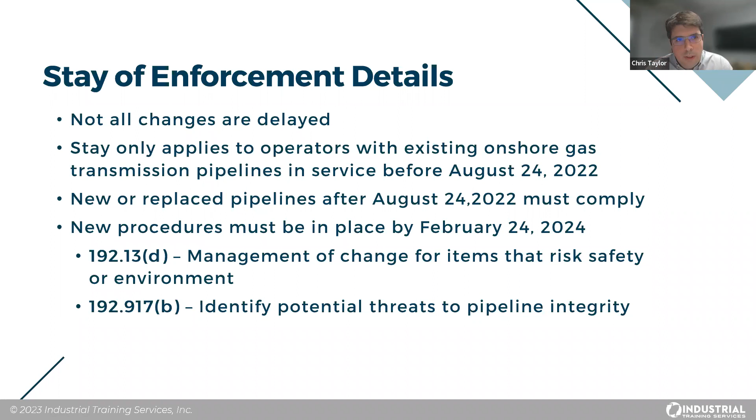So is this stay of enforcement just at the federal level? I'd imagine so. But how will states react, or do they typically honor these? How does that work? Well, PHMSA has requested that the states follow this stay of enforcement, but a state can impose this final rule on intrastate pipelines. So they don't have to.

I believe most states will likely follow the stay of enforcement. One, since there's not any guidance provided by PHMSA on what the operator should be doing, states would really not know exactly what they're supposed to be inspecting to. And one of the things about these last two requirements that we were talking about, for the management of change and potential threat identification portions, an operator could request an extension up to 1 year to get those done for their program if they file it within 90 days of that February 24th, 2024 deadline, and they'd have to go through the electronic notification request.

So even more reason to be digging into this, and many operators I'm sure already are getting ahead of this, and it sounds like you do have some flexibility with even requesting extensions to comply. Thanks for the explanation on stay of enforcement. That's always kind of interesting to me on how some of this works.

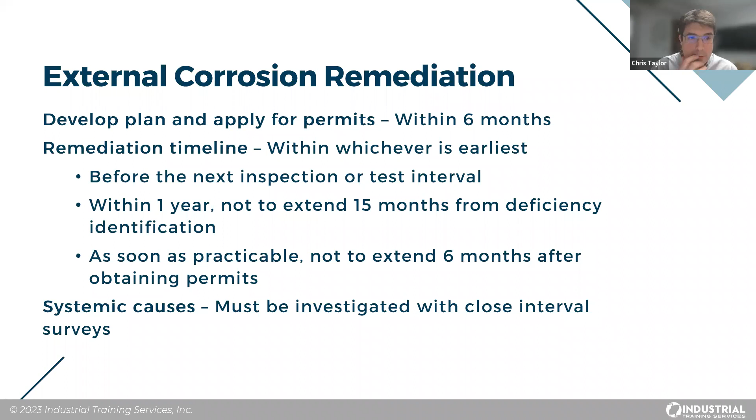So whichever is earliest, before the next test interval or inspection. So depending on what area the external corrosion is on, within 1 year, not to exceed 15 months from the deficiency identification, or as soon as practicable, not to exceed 6 months after obtaining the permits. So they're calling it out. And another thing they called out was anything that appears to be a systemic cause has got to be investigated with close interval surveys, which we'll talk about in just a little bit. So it's very prescriptive timelines for repair.

What are the requirements for interference current issues? Again, there used to be just a short blurb about interference, but now they're going specific. So when to conduct these interference surveys, if an operator is aware of significant increases of stray current. So they're going to be looking for operators to actually be doing those investigations to see if there's stray current on their facilities. So if new pipelines come into the right of way or new overhead lines, that would be new potential stray currents that are introduced, but making sure that you've done surveys to see if it's affecting your pipeline or not.

And then again, you have to develop a plan and apply for those permits within 6 months. So if you're on BLM land or Corps of Engineers land, to get in there to do some work once you know that you've got this interference, they're wanting people to be proactive about this. And then the remediation timeline, very similar to the external corrosion, within 15 months of completing that survey, then that's being remediated. And then as soon as practical, not to exceed 6 months after obtaining those permits.

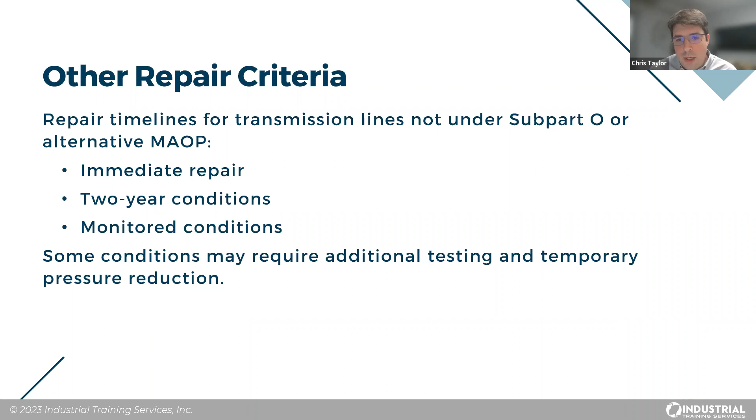Besides planning for repairs and adopting new timelines, PHMSA also updated and created new and revised definitions for Part 192. From what I understand, Warren, these are a very important part of the regulations. How do operators use these? Why are they important? Well, certainly the addition of a definition is to help them describe what's going to be required in the parts of the code that they've added or amended. So an operator uses these definitions to say, okay, this affects me, or this doesn't affect me, or under this certain condition, I'm going to be affected and I need to know what I need to do.

Let's get into some of the specific definitions that were added. Let's start with the new ones. Close interval survey, this is a requirement that operators use close interval surveys when they find these systemic deficiencies with their cathodic protection levels for external corrosion. It was never specifically called out that they use close interval surveys, but now they will have to.

These systemic conditions would be, say, over 4 or 5 miles of pipe. You've got a really low area, not just a single test station, but a longer stretch, maybe a short lateral. A single station wouldn't be systemic because you may have a lead that has fallen off of a rectifier or something like that. But certainly a lot of operators do use close interval surveys, but it's actually called out more now.

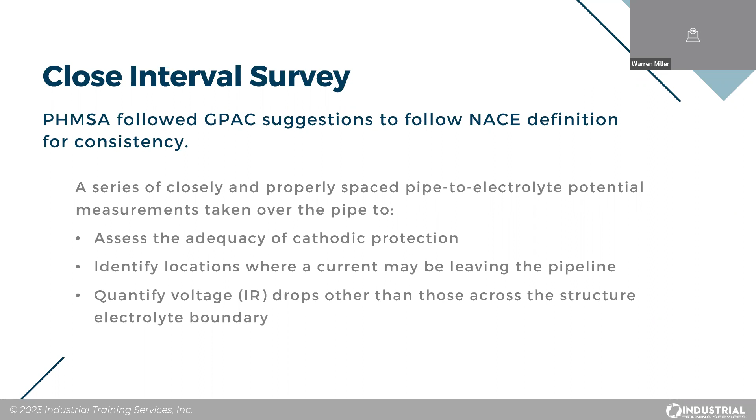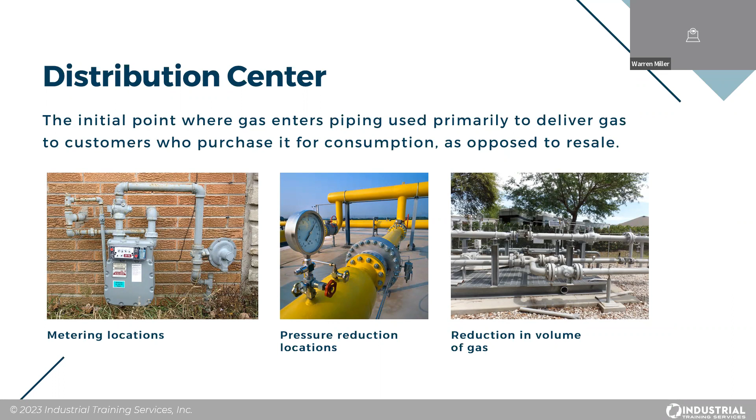All right. Distribution centers, that's a new one, isn't it? It is. Distribution center is now specifically defined to further add the separation between distribution and transmission facilities. One of the things it talks about is the initial point where gas enters piping used primarily to deliver gas to customers who purchase it for consumption as opposed to resale. And this includes metering locations, pressure reduction locations, and locations where there is a reduction in gas volume. So it's given operators that much more information in how to determine what systems they have.

I know there's additional definitions on screen that we're not really going to get into, but they're spelled out and very clear about what they're intended to mean. Understanding that PHMSA has defined it because somewhere in this final rule they're addressing it with certain requirements, wanting to make sure it's crystal clear. The operator knows what PHMSA considers a wrinkle bend or a hard spot, or an inline inspection. Definitions are put in when they are not the same as a Webster dictionary definition - they've either defined it more critically or added additional information not typically found in a dictionary, and that's why they're in here like this.

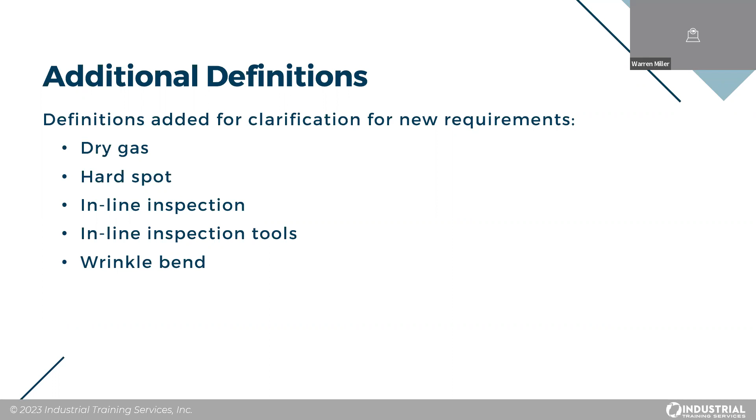Something significant within the definition then would translate into how operators should really look at these definitions and make sure they understand what PHMSA understands to be a wrinkle bend, for instance. Correct. Were there any definitions that were revised?

There was one revision, and it's transmission line. So transmission line now has a fourth opportunity - an operator can voluntarily designate that their pipeline is a transmission pipeline. So the first three have been very standardized: transports gas from a gathering line or storage facility to a distribution center, operates at a hoop stress of 20% or more of SMYS, or transports gas within a storage field. So you meet this definition if you are here, but this allows somebody who actually has a distribution system, in certain cases, to call themselves a transmission pipeline.

I assume once they've designated that, they probably aren't going to be allowed to go back, but that's my assumption. I'm hoping PHMSA actually provides guidance on what this last bullet really is meaning. I'd be curious as to why this would be advantageous for operators. That'd be interesting.

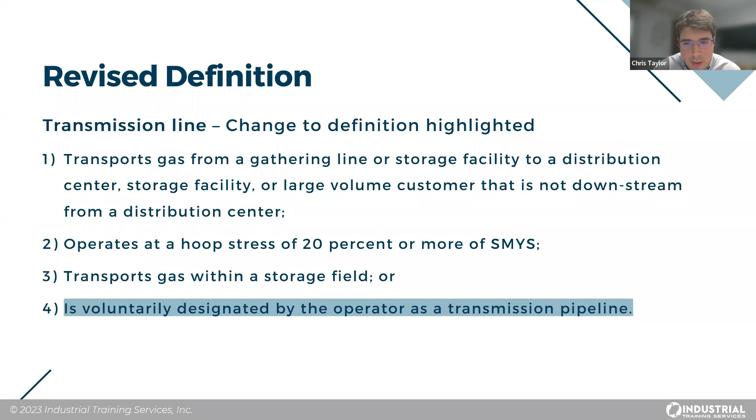Warren, let's discuss new assessments of pipelines after installing 1,000 feet or more in a ditch. Can you explain what's now required in this scenario for transmission pipelines? 192.319 talks about an operator must perform a baseline assessment within 6 months of placing that pipeline in service. So this will include new construction, or if you're adding in new pipe, and it's 1,000 feet or more continuous length, which triggers this requirement.

Again, it does include new construction, and it's assessing for coating damage. Not just during normal construction where coating is inspected with a jeep or something like that, but now PHMSA is looking for operators to actually utilize technology to assess for coating damage after the fact. And if damage is found, they've got to make repairs. And if they're using technology other than what's accepted or stated in 192.319, then they've got to notify PHMSA 90 days prior to using that technology. PHMSA has the opportunity to say yes or no, or if they don't respond at all, then the operator can go ahead and use that new technology.

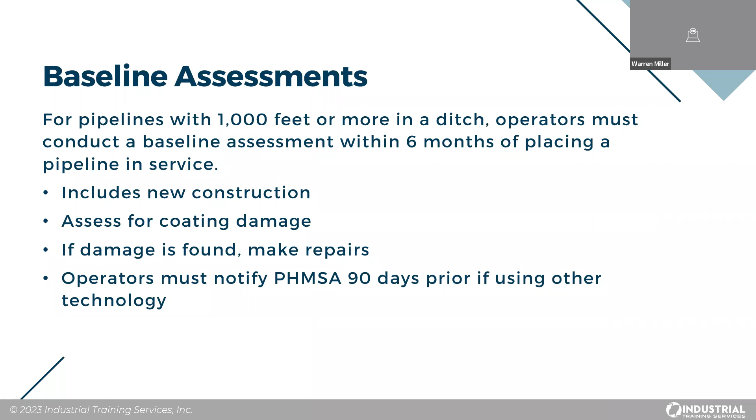This comes from a lot of pipe that gets put in - it's amazing the number of defects that are found later on after a pipe's been put in the ground that was damaged, possibly by the last handling of the pipe going in, or it's put on rocks. There's just a number of reasons for this. So it sounds like that's why it's covering new construction - to really just make sure there's a baseline assessment and that the pipe was installed without damage during installation.

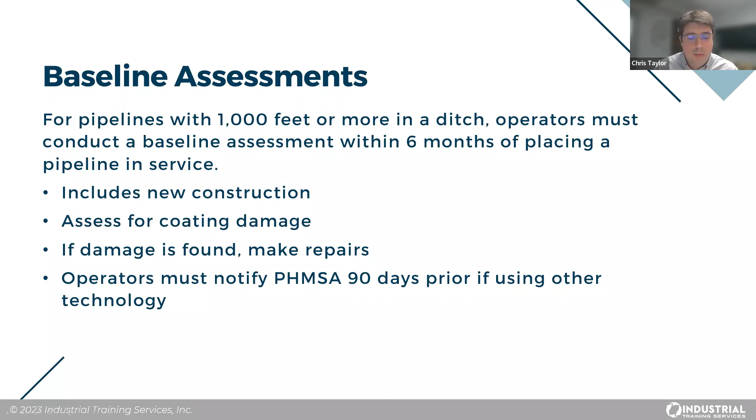Right. Now we're getting into some more prescriptive and highly technical aspects of the regulation change. There are now specific requirements for using ICDA, or internal corrosion direct assessments, and direct assessments for stress corrosion cracking. So that's a mouthful, just to start. As I understand, Warren, these new requirements are incorporated by reference, by NACE.

Warren, what does that mean when a standard is incorporated by reference? PHMSA has the authority to review a standard, and when it says incorporate by reference, it means taking that document, all or part of it, and actually requiring it to be utilized as code, for lack of a better word. This incorporation by reference can be part of it or all of it. And when the standard says 'should' or 'could', it becomes a 'must' or a 'shall' in regulation. So what had been used as guidance when it was just a standard not incorporated by reference, once it becomes incorporated, it becomes the regulation.

And this has occurred - there are a large number of standards that have already been incorporated by reference. NACE is the National Association of Corrosion Engineers. This is a current standard under them.

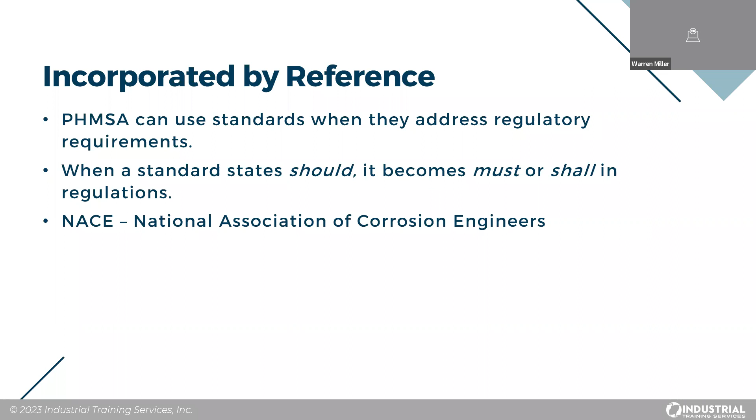I understand. So 927, ICDA, or internal corrosion direct inspections. Tell us more about that. Well, if you look in this final rule, 927 and 929 cover a lot of pages. Understand if you print this out, it's in 3 columns, very small font, and very detailed, explicit detail, just like the ICDA talks about. You have to have a plan, talks about the pre-assessment, indirect inspection, the detailed exam that you've got to perform, and then post-assessment evaluation and monitoring. So it lists out a program for doing this work.

929 is very similar, that direct inspection for stress corrosion cracking. Operators, and again, these both - 927 follows the NACE SP0206 and 929 follows SP0204. They have very specific requirements in there, and will help an operator develop the plan, understand what they've got to do, and then mitigate and follow up for the evaluation. So again, a lot of information that's in there. Whoever is responsible for this at your company would need to really dig into this and understand the requirements. So I imagine operators already using or utilizing 204 and 206 are going to be in really good shape already. It would be, yes. Probably.

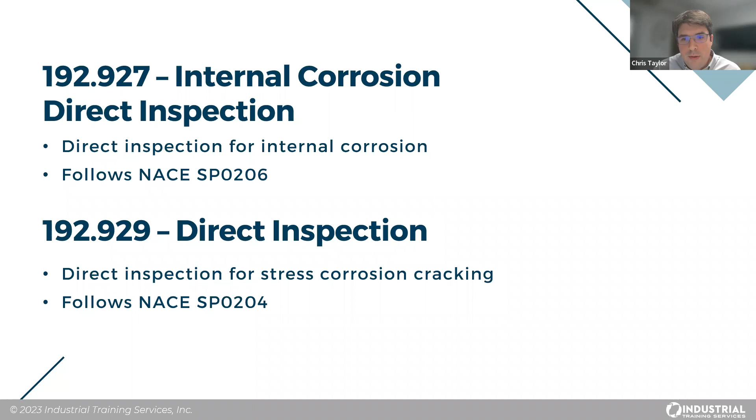That leads us to our final major topic we're covering during this webinar. PHMSA is addressing management of change and the requirements operators will have to follow. So what should operators consider when developing their management of change, Warren? Well, there are a number of operators that have already had management of change and may not have covered their whole program. It may have been just their OQ program or their O&M program or integrity management. But this is going to require looking at a process for evaluating and mitigating the significant changes that could pose a risk to the safety or the environment. Very explicit, and there's a lot of documentation involved, picking the right people who are involved with the management of change. Got to follow the ASME ANSI B31.8S section 11 on this.

And this one must be implemented by February 26th of 2024. This is for all pipelines except for the ones that are already in the integrity management program. For all the other lines, except integrity management, they've got to have this MOC. Now, some operators may use the MOC they've already got for their integrity management, have it as maybe a subset, or maybe even as a standalone MOC. But again, make sure that they've looked at that section 11 to make sure they're following that. And operators can request an extension of up to 1 year in getting this put together. But make sure if you're going to get that extension request in, at least 90 days ahead of time.

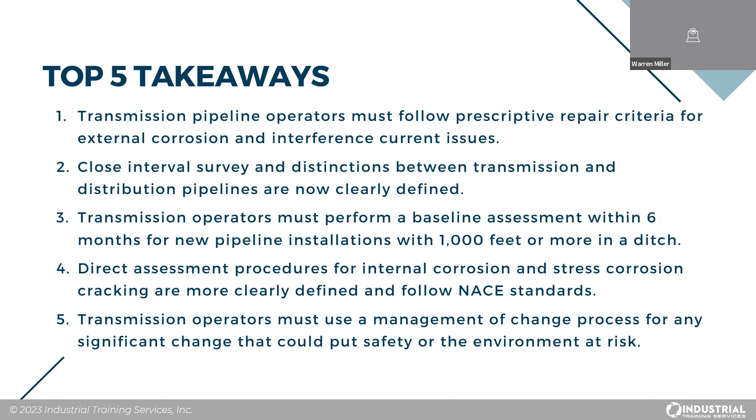Thank you for recapping our takeaways from this new final rule about to go into effect. We'll send out these takeaways and include a link to the final rule in our follow-up email following the webinar. We highly recommend that you and your teams review the rule in its entirety and be prepared, and do not delay, even though you do have a stay of enforcement that'll hopefully help you implement these changes.